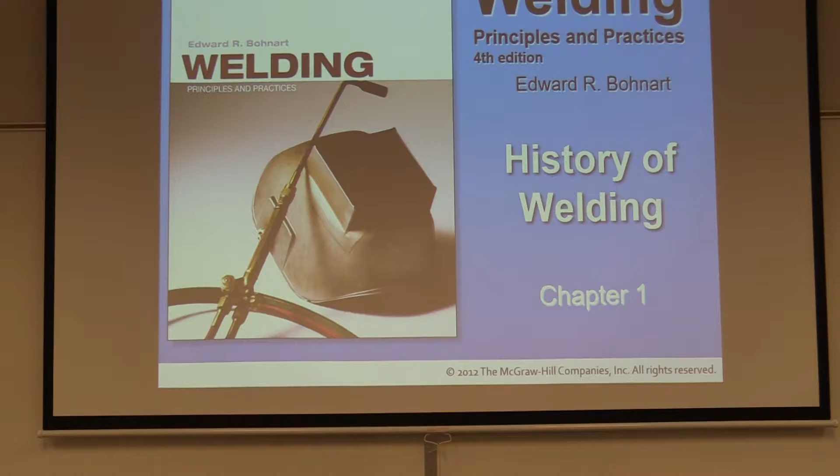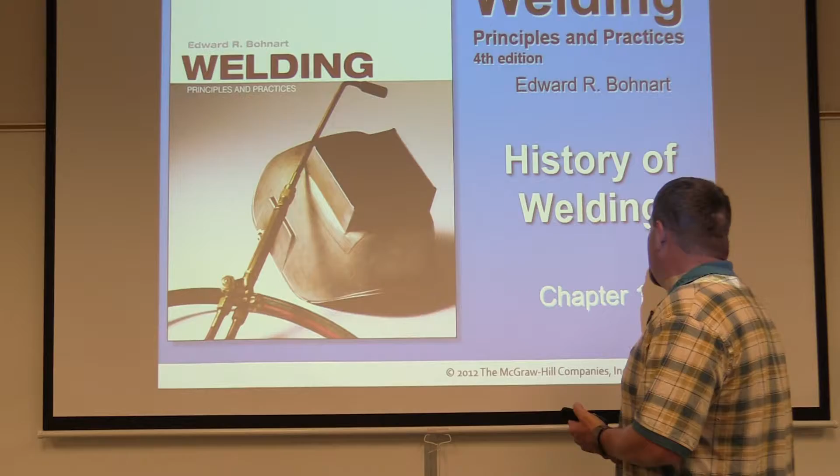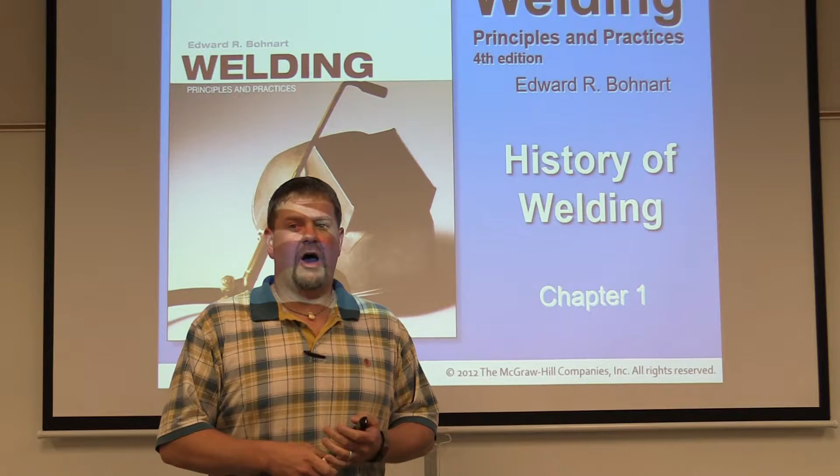This is chapter 1 of the Welding Principles and Practices book. You may not be getting this book your first class. You might be waiting until your second term. Make sure that you're devoted to the program before you pay money for the book. However, if you know you're going to continue to keep going through the program, I strongly suggest getting this book.

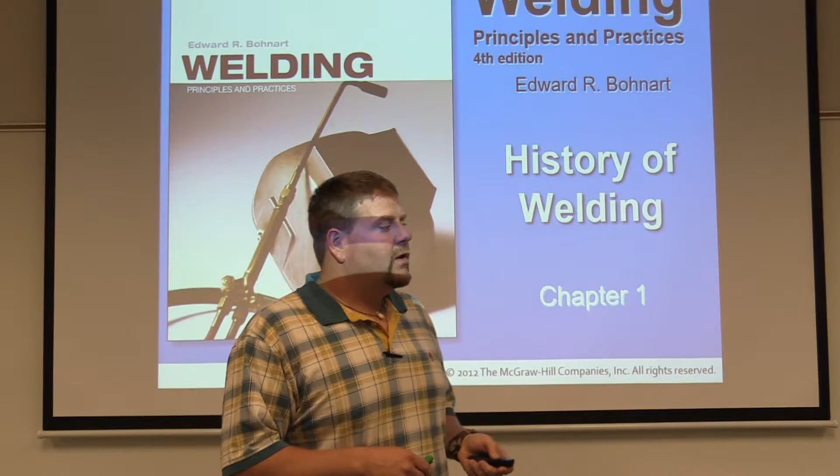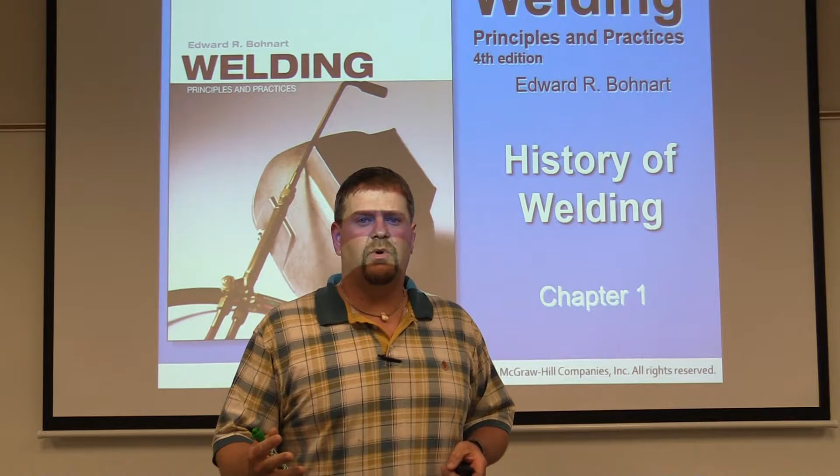You can use the video lectures, highlight things out of the book that I'm going to talk about and discuss, along with going through the PowerPoint presentations. Now the PowerPoint presentations are available on Blackboard as well. I'll be able to go through this. I'm going to talk about some things that I feel are important, not just reading from the book, but also how they tie into everyday situations within welding and your career, moving through your career.

Bear with me a little bit. We're just kind of starting out a new room. This is the first video we're doing.

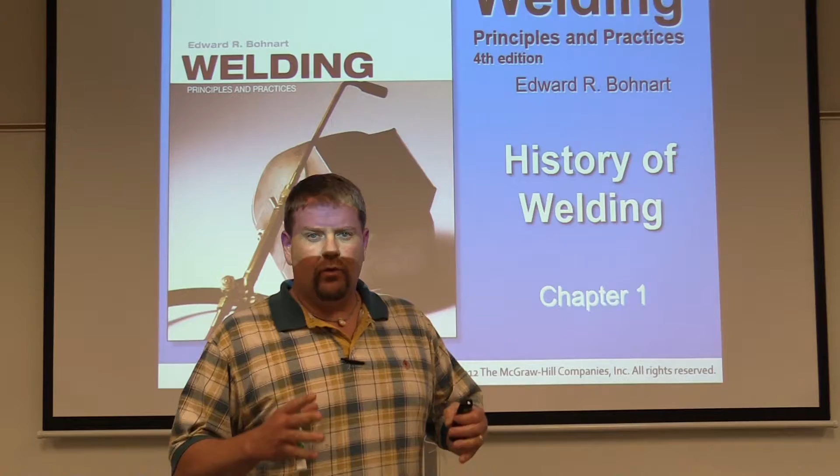So let's talk a little bit about successful note taking, okay? So for example, here's a PowerPoint presentation. You're going to be able to find some of this stuff in your book as well. Most of the material out of it's the same. So I'm going to tell you which page it's on. I'm going to say, left-hand column, about halfway down. So for example, let me just start out doing it.

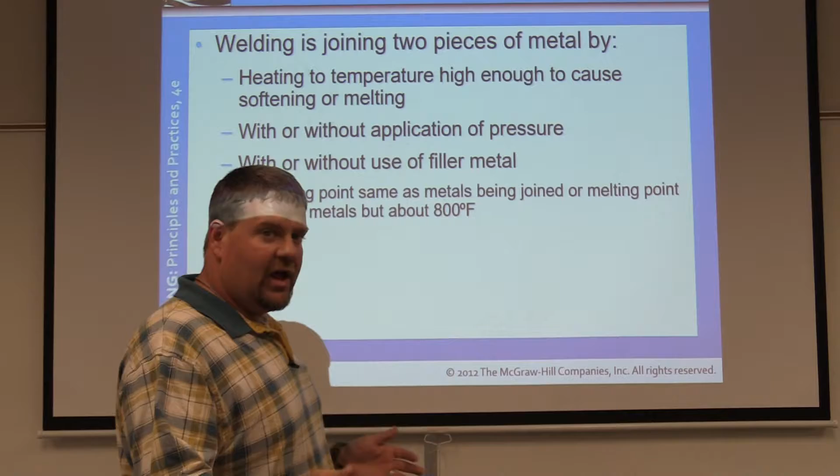Page 2, chapter 1. History of welding, left-hand column, it's going to start out overview. Now the second paragraph in starts out with the word welding, and basically I'll read from it and you can highlight that paragraph, or you can also look at it. We're going to hit the highlight and the bulleted points from the PowerPoint here. Okay, so let's start out.

Welding is the joining together of two pieces of metal by heating to a temperature high enough to cause softening or melting, with or without the application of pressure, and with or without the use of filler metal. Any filler metal used has either a melting point approximately the same as the metals being joined, or a melting point that is below these metals but above 800 degrees Fahrenheit.

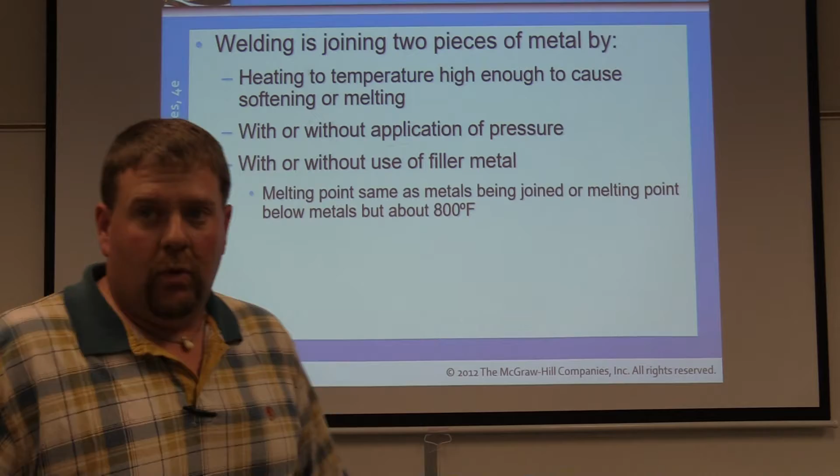So that's one paragraph that I started to read out of the book, and I might tell you that's a bulleted point. Now anything I read on these lectures, you want to highlight or take notes on, okay? So starting this year, we're probably not going to allow you to use the book. You're going to have to take handwritten notes. You can bring your handwritten notes in. You cannot type off the entire PowerPoint presentation. Okay? Handwritten notes only are allowed on the test, and we're going to stick with that throughout the program.

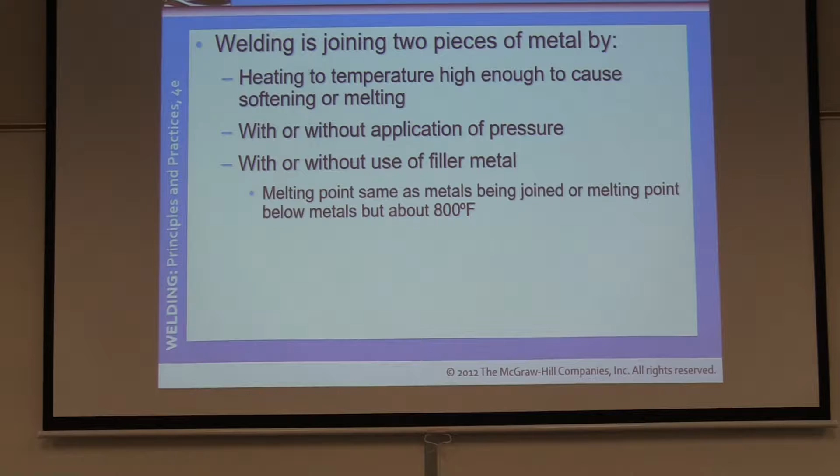Okay? So first thing, just what we read, welding is joining two pieces of metal by heating to a temperature high enough to cause softening or melting, with or without application of pressure, with or without use of filler metal. Melting point, same as metals being joined, or a melting point below metals, but above 800 degrees.

So as we get more and more throughout the courses, we're going to start talking about different things. So what's the melting point of iron ore? You know, roughly 2800 degrees, 2780, 2790, right in there, degrees Fahrenheit. 800, 840 can be a very critical temperature between brazing versus soldering. These are all essential variables that matter within the welding technology field. Okay, so let's move on to the next one.

Let's go to page number 3, underneath the history of metalworking. 1, 2, 3, 4, or the third sentence down, it starts out, the first metal to be worked was probably pure copper because it's a soft ductile metal that was widely available. Ductile, you see it highlighted, means easily hammered, bent, or drawn into a new shape or form. Okay? So this is hitting some high points, but notice we don't say anything about being ductile, correct? Okay, so let's go back.

So some of your test questions may not just be off the PowerPoint, some of them might be off of things I talked about. So for example, ductile is a bulleted item. You need to understand what ductile means, okay? And let's read it again. You can always look back in the definitions as well, but ductile means easily hammered, bent, or drawn into a new shape or form. Okay?

So let's skip down 1, 2, 3 sentences. Right-hand part of that column, it starts out and it says more than 4,000 years ago. Okay? Again, more than 4,000 years ago, copper mines on the peninsula of Sinai and the island of Cyprus were worked.

I may not have pronounced them correct. Welding began more than 3,000 years ago when hot or cold metals were hammered to obtain a forged weld. Forged metals, bronze and iron, are mentioned in the Old Testament.

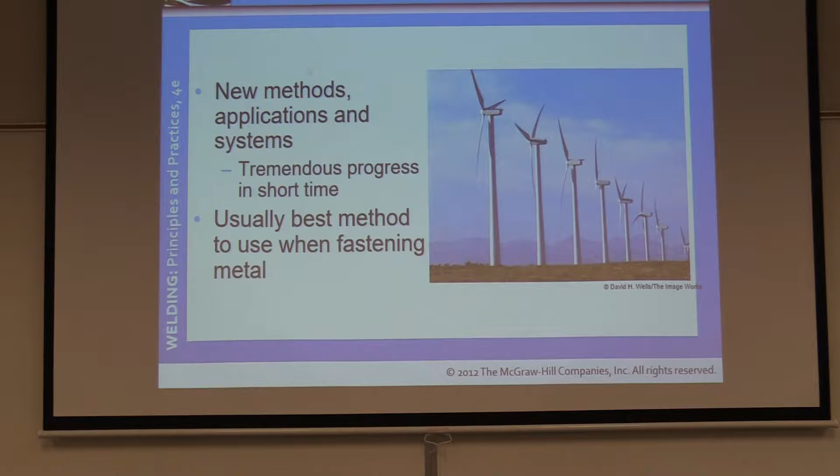So you may get a question asked that says welding began more than 2,000, 3,000, 4,000 years ago. Okay? In this case, according to the text, it was more than 3,000 years ago, even though at the beginning of the sentence or the paragraph it stated more than 4,000 years ago. Okay?

Here we talk about began when people found they could shape rocks by chipping them with other rocks. Copper, probably first metal to be worked. Here we're talking about ductile. Okay? Easily hammered, bent, or drawn. It was dated in Egypt as early as 4,000 BC and USA before 2000 BC.

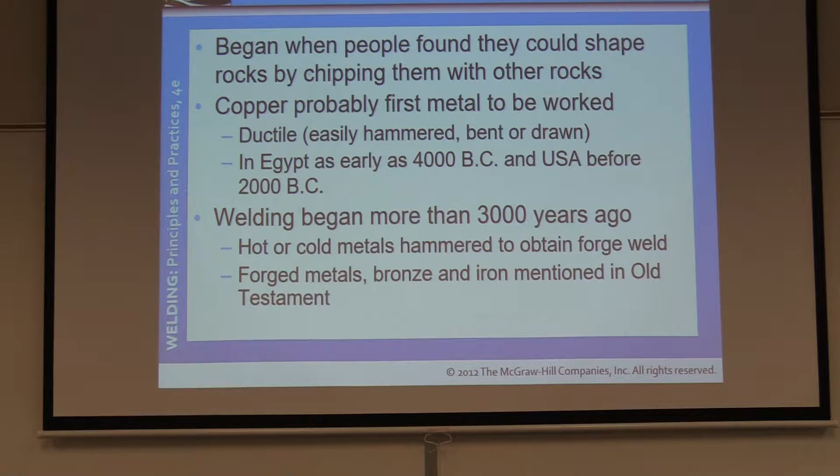Welding began more than 3,000 years ago. Hot or cold metals hammered to obtain a forge weld. Again, it was written into the Old Testament. Next paragraph. Archaeologists have determined that bronze was developed sometime between 3,000 and 2000 BC. Iron became known to Europe about 1000 BC, several thousand years after the use of copper.

So we talk about the Bronze Age, we talk about the Iron Age. This gives us a little bit of perspective as far as what timeline it was there. Okay, so bronze was developed between 3,000 and 2,000. Iron became known to Europe about 1000 BC. The Philistines had 4 iron furnaces about 1300 BC, produced swords, chisels, daggers, and spearheads.

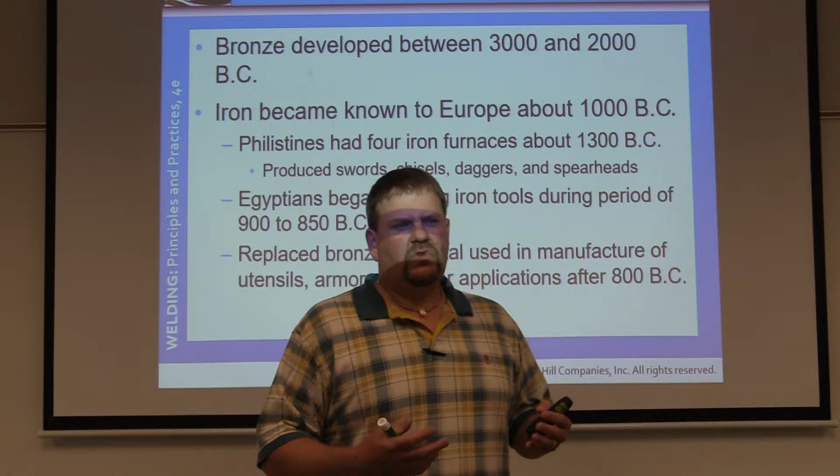Egyptians began making iron tools during the period of 900 to 850 BC and replaced bronze as metal used in manufacture of utensils, armor, and other applications. Part of the reason why is because iron is a lot harder material. We just talked about ductile. Bronze was very ductile. It's easily bent, hammered, and forged. So it's a lot softer material than iron itself was.

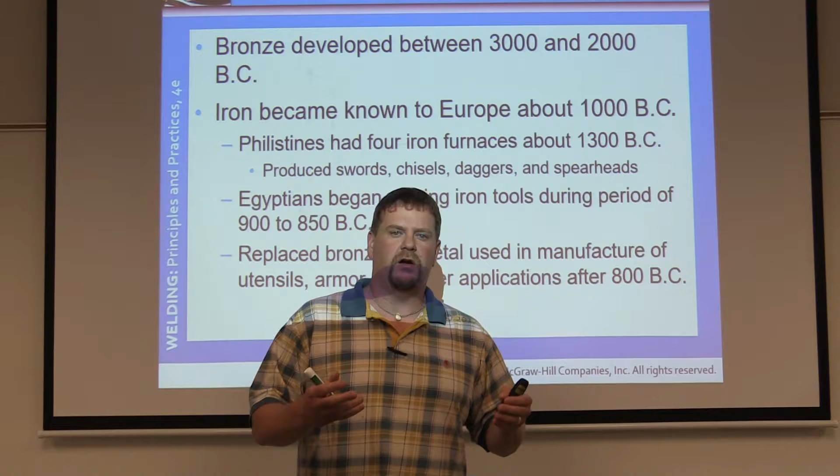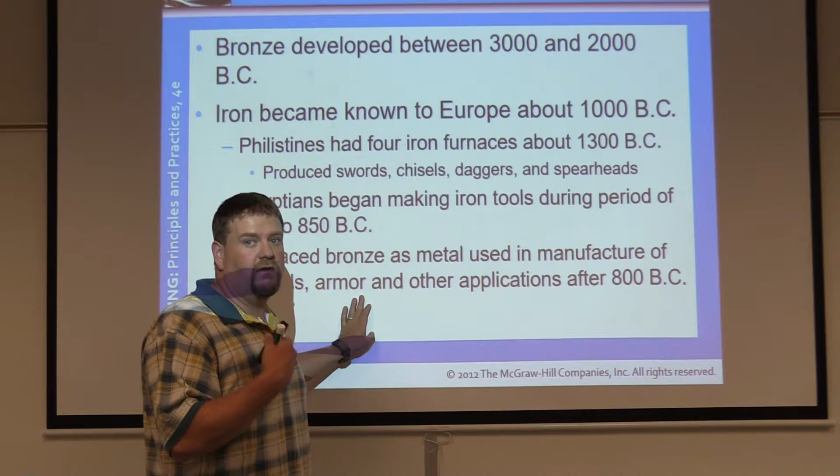So for an example of armor, you want a really hard material there to be able to keep spears, arrows, swords, and so forth from penetrating into it. If it was really soft, it would eventually get thin and break through, costing you your life at that era. All right.

Next paragraph, the famous Damascus swords and daggers made in Syria about 1300 BC. Okay? They were sought after because of their strength and toughness, made by forge-welding iron bars of different degrees of hardness, drawing them down and repeating process many times. The working of metals followed one another in great ancient civilizations.

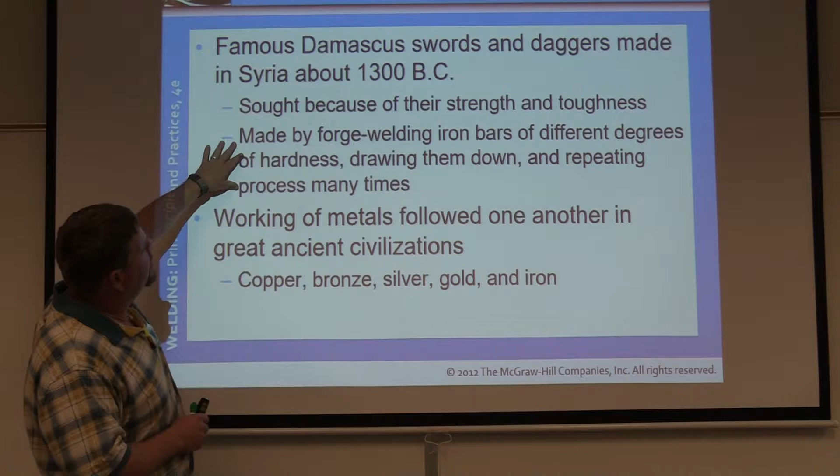Okay, let's take a break for a second. We start out working of metals, so let's just make sure that we're on the same page here. This was one paragraph that started talking about famous Damascus swords and daggers. It's on page 3, right-hand column. It's the second paragraph from the bottom. You can follow along the bullet points in your book. So if I was you, I would highlight that entire paragraph and what it talked about here, along with the PowerPoint, okay?

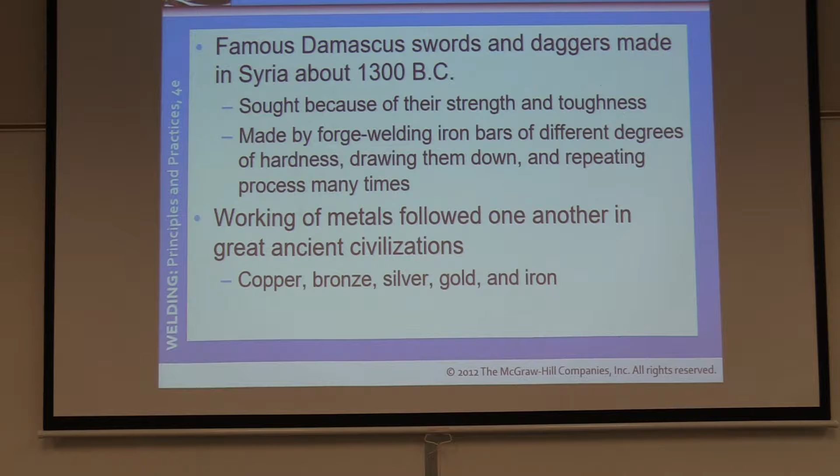Now the last paragraph starts talking about the working of metals. The book reads, the working of metals, copper, bronze, silver, gold, and iron, followed one another into the great ancient civilizations. By the time of the Roman Empire, the use of iron was common in Europe, the Near East, and the Far East. The Chinese developed the ability to make steel from wrought iron in AD 589.

The Belgians were responsible for most of the progress made in Europe due to the high degree of craftsmanship developed by their workers. By the 8th century, the Japanese manufactured steel by repeated welding and forging and controlled the amount of carbon in steel by the use of fluxes. They produced the famous samurai sword with a blade of excellent quality and superior workmanship.

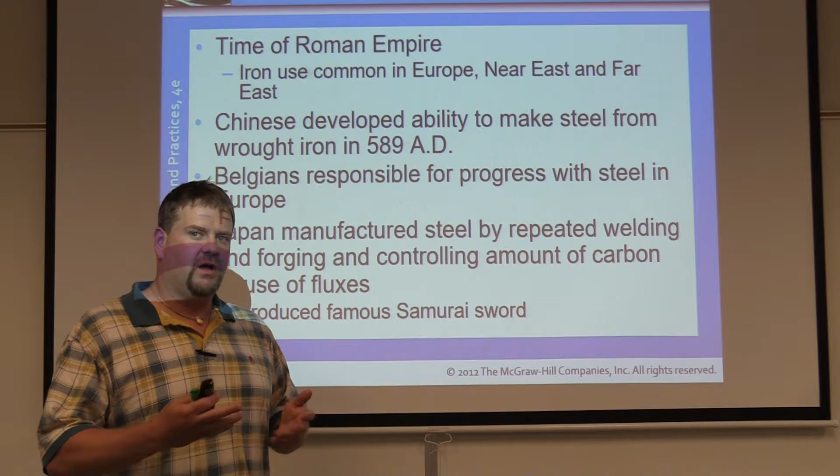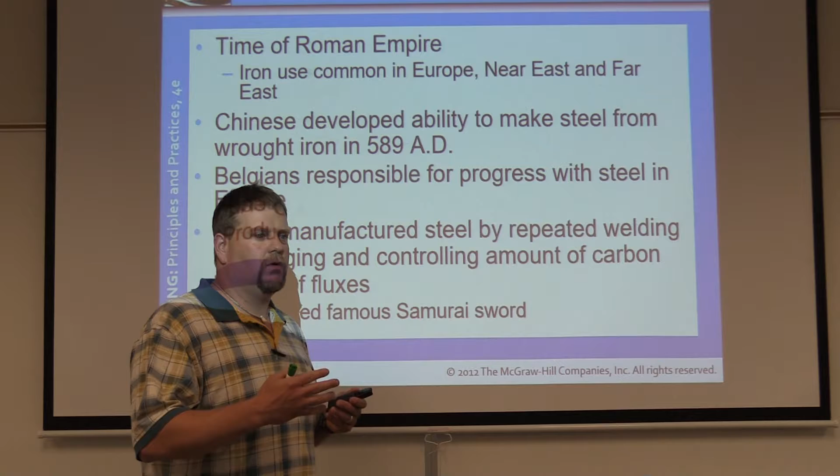If you get a chance, there's another one out there called the Ulfberht sword. There's a PBS, Public Broadcasting Service, video out there. You can go online and find it. It's free to look it up, and the documentary is actually called The Viking Sword. Really great video. It really starts to explain the metallurgy within it and how much work went into forging of swords, materials, and so forth, especially in that era.

Okay, so now we're on page 4, chapter 1, second paragraph down. Biggest thing that I want to focus on here is the blast furnace developed for melting iron about 1000 to 1200 AD. Now we just went back, we talked about iron was found in Europe 1000 BC, roughly 1300 BC as well. And now we're talking about the blast furnace was developed almost 2,000 years later, okay?

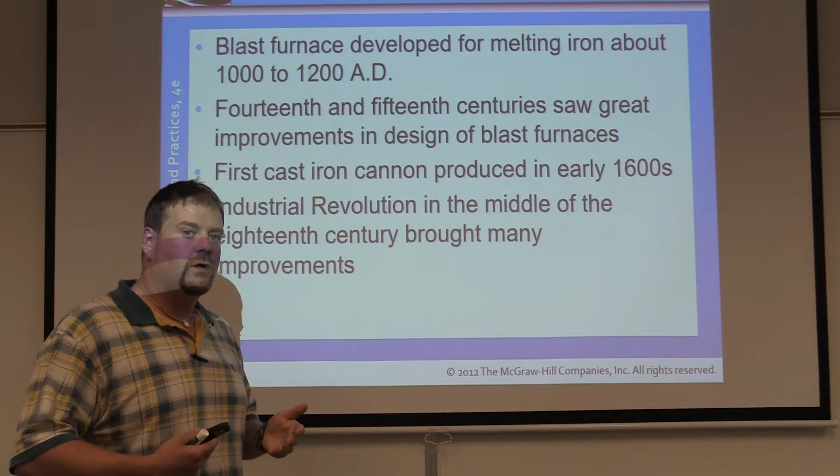So there was a long era there where forge welding was the only type of welding being used in the world. With the addition of blast furnaces, now we're able to start getting different qualities out of iron and steel, making steel, because steel is iron and carbon. We're starting to get better qualities out of the material we were manufacturing at that time, which was a huge benefit to a lot of soldiers, countries, equipment, and so forth, okay?

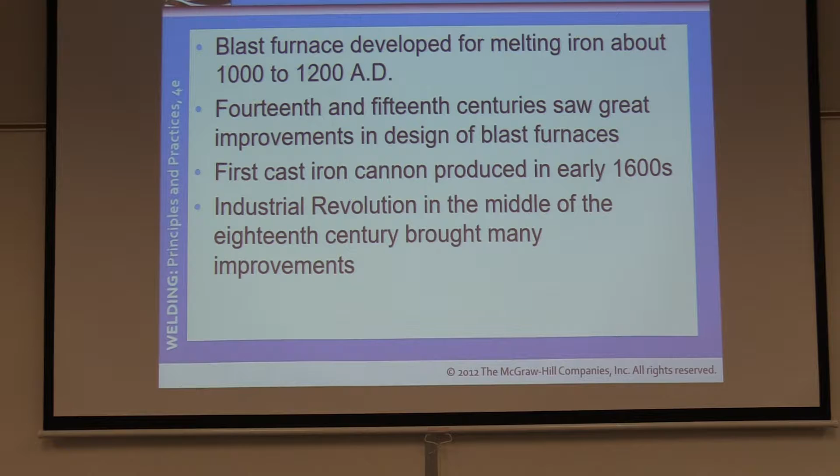14th and 15th centuries saw great improvements in design of blast furnaces. First cast iron cannon produced in the early 1600s. The Industrial Revolution in the middle of the 18th century brought many improvements. History of metalworking. The present factory system of mass production introduced. American Eli Whitney developed the idea of interchanging parts in the manufacture of arms.

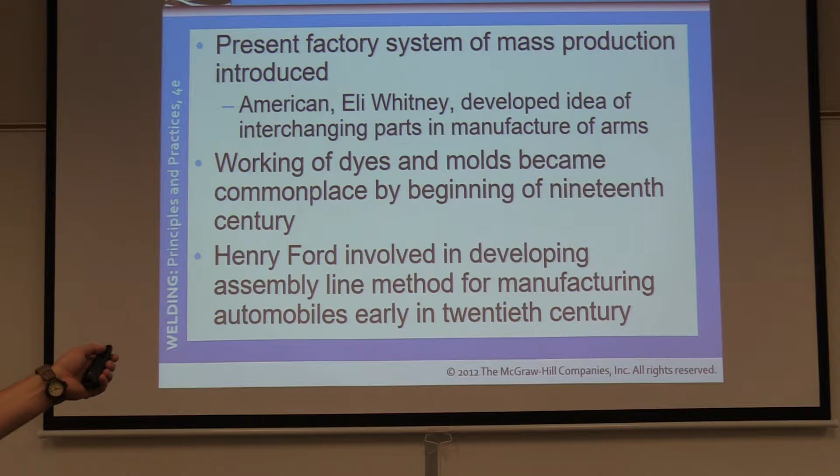Okay, let's back up. Let's look at our book. We're on page 4, left-hand column, halfway down, underneath the early developments in welding. The paragraph above that, this is where we're still at, about halfway through. You see him start talking about Eli Whitney, the development of interchanging parts and manufacture of arms. Okay.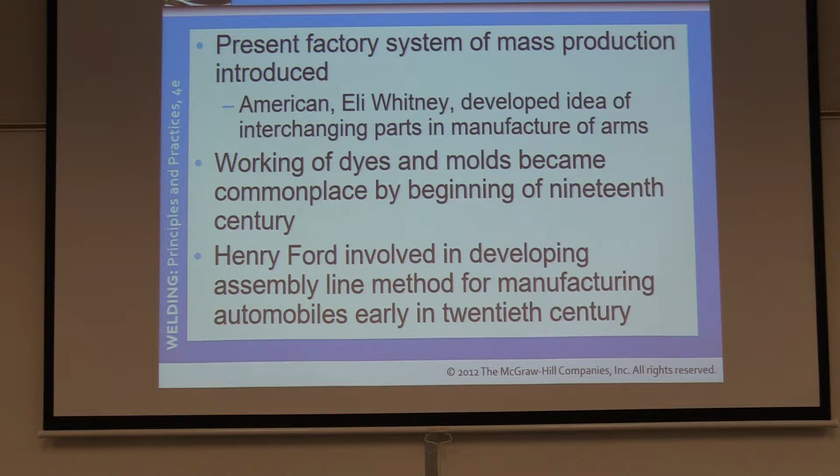Working of dies and molds became commonplace by the beginning of the 19th century. We still use that today. It speeds up the process. Jigs, fixtures, dies, and molds. Very important. Henry Ford was involved in developing the assembly line method for manufacturing automobiles early in the 20th century as well. All right.

So, let's go to chapter 1, page 4, early developments in welding. This is a bulleted item: at the beginning of the 19th century, Edmund Davy discovered acetylene, a gas that was later used in oxyacetylene welding, heating, and cutting. The electric arc was first discovered by Sir Humphrey Davy in 1801 while he was conducting experiments in electricity. These inventions were forerunners of present arc welding processes.

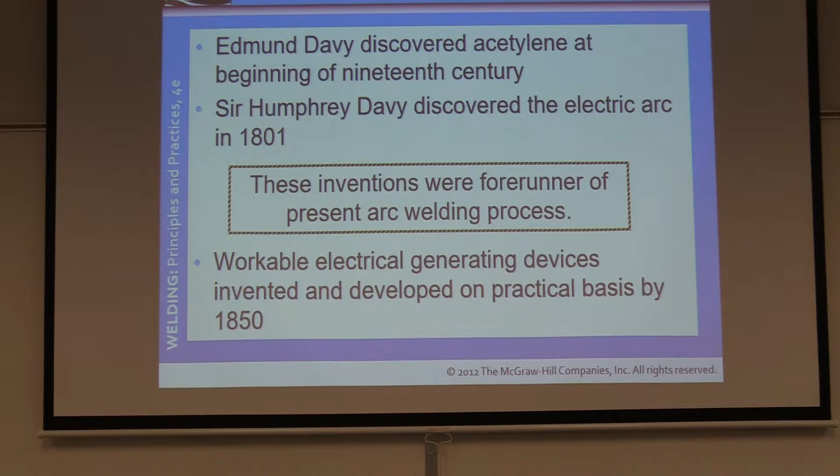The first documented instance, sorry, I'm going to stop right there. Next paragraph down, the first documented instance of fusion welding was done by Auguste de Méritens in 1881. He welded lead battery plates together with a carbon electrode.

This entire next page is just a highlighted item I want you to read through. It's very fascinating. You're going to see 1 or 2 questions out of it. Mainly they will be coming off of this PowerPoint, but a little bit out of my lecture as well. Okay.

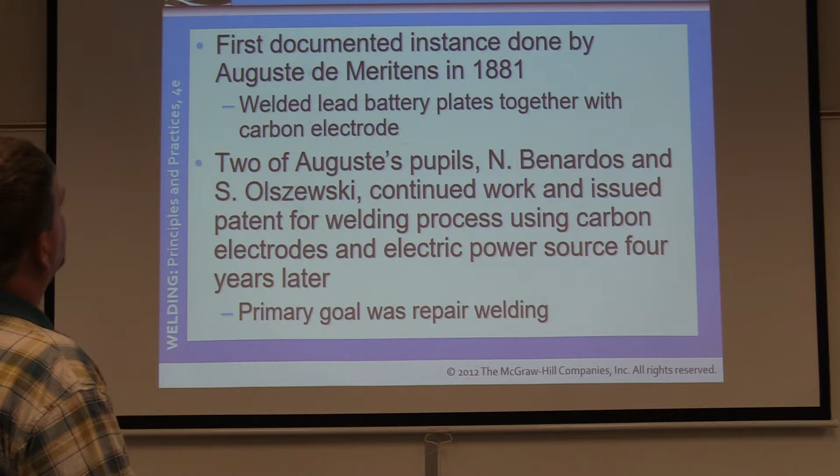Two of Auguste's pupils. I believe it's Nicholas. Let me look at the book here. Oh, it doesn't say. N. Benardos and S. Olszewski saw the possibilities of this discovery and experimented with the arc powered by batteries that were charged from high voltage dynamos. Okay? Using carbon electrodes and an electric power source 4 years later. Primary goal was to repair things so you didn't have to redo that.

Out of the book, after 4 years of work, they were issued a British patent for a welding process using carbon electrodes and an electric power source. Applications of the process included the fusion welding of metals, cutting of metals, and the punching of holes in metal.

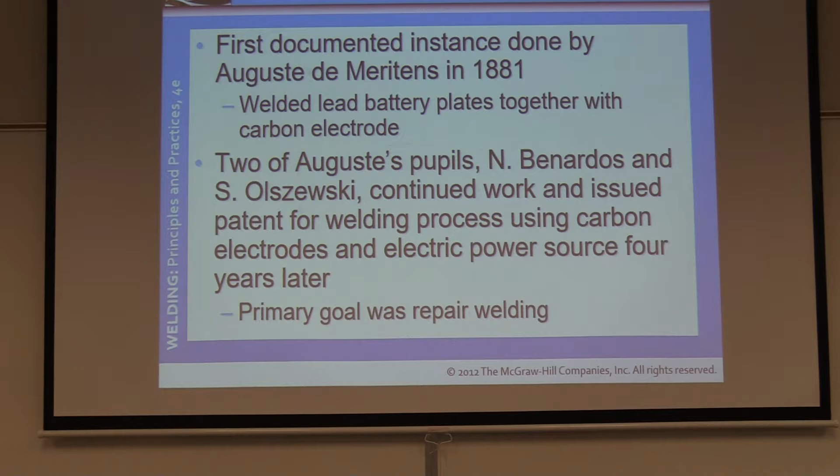Okay, we're going to skip over to page 4, right-hand column, first full paragraph down. It starts out, bare metal electrode welding was introduced in 1888 by N.G. Slavianoff, a Russian. His discovery was first recognized in Western Europe in 1892. C.L. Coffin was one of the pioneers of the welding industry in the United States. In 1889, he received a patent on the equipment and process for flash butt welding. And we'll talk about that later on as you're going through the program, okay?

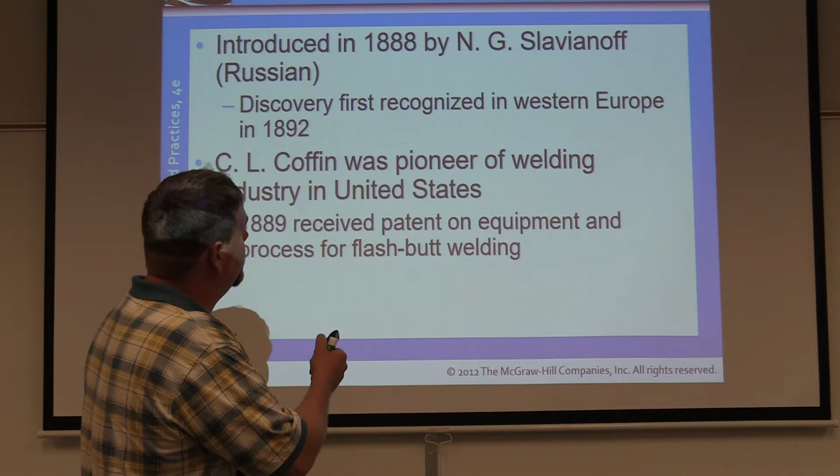So let's read through here. In 1890 he received additional patents for spot welding equipment. In 1892, working without knowledge of Slavianoff's work, he received a patent for the bare metal electrode arc welding process. By the turn of the century, welding was a common method of repair.

Highlighted especially at this time, welding was given added impetus by the development of the first commercial oxyacetylene welding torch by two Frenchmen, Fouché and Picard. Bare electrode welding became the prevailing electric arc welding method used in the U.S. until about 1920.

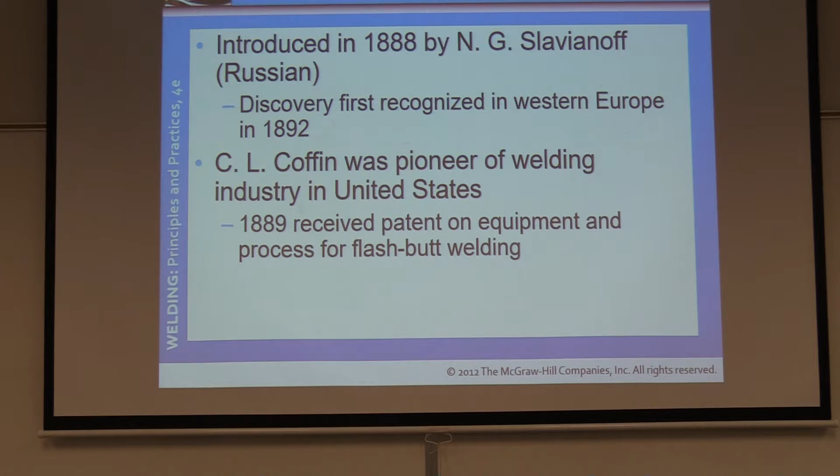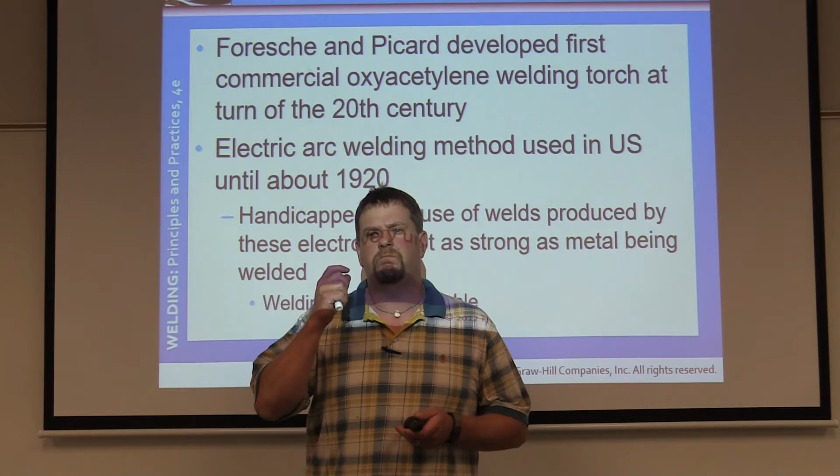So, here we talked about the electric arc welding method used in the U.S. till about 1920. It was handicapped because welds produced by these electrodes were not as strong as the metal being welded. The welding arc was very unstable. Remember, this was the beginning of the shielded metal arc welding electrode. So it didn't have the flux on it to help stabilize it. It was just a bare metal wire that they started welding with. Okay.

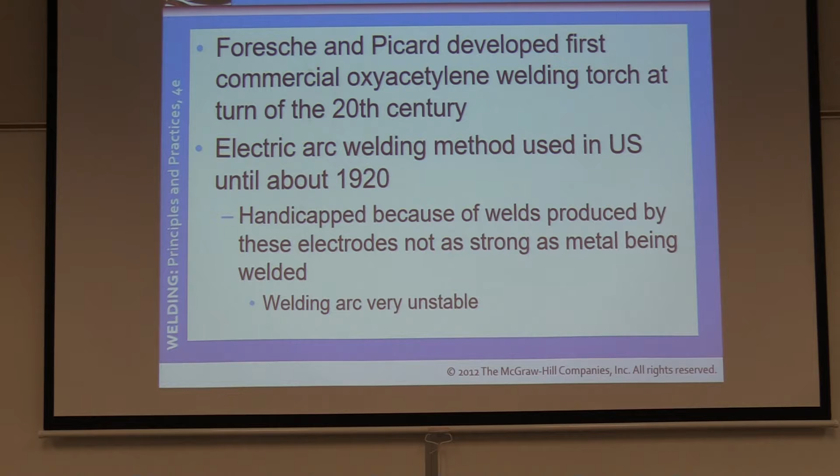Next paragraph, let's go down 1, 2, 3, 4 sentences in the center. Starts out, it says, in 1907, Kjellberg, a Swedish engineer, received a patent covering the electrode coating process. The coating was thin and acted only as a stabilizer of the arc rather than as a purifier of the weld metal. Produced welds a little better than bare electrodes, but again, not quite to the level that we're seeing today. Okay?

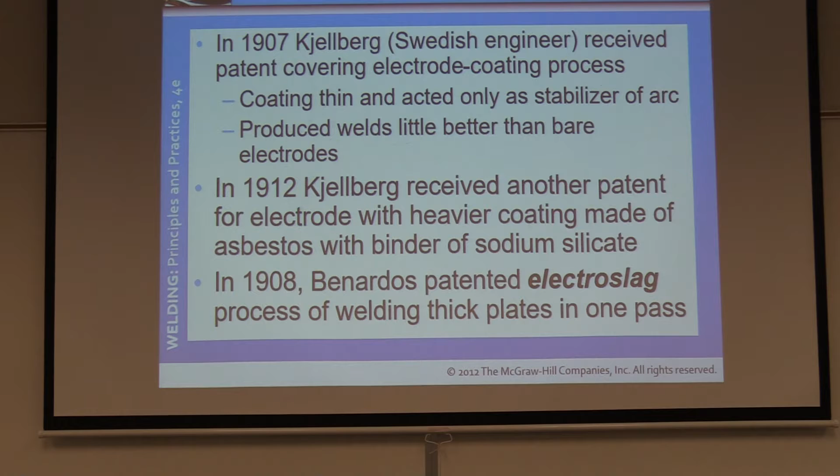In 1912, Kjellberg received another patent for electrode with heavier coating made of asbestos with binder of sodium silicate. In 1908, Benardos patented electroslag process of welding thick plates in one pass. And that's kind of a bolded item because electroslag is a process that's different than shielded metal arc welding.

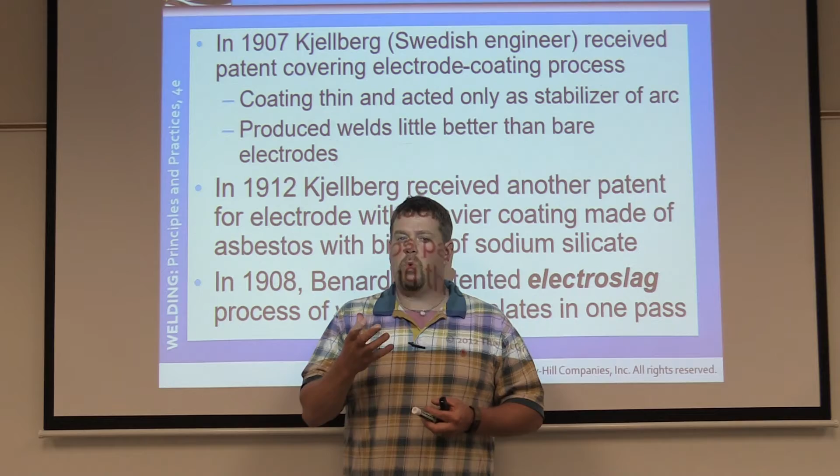Electroslag typically welds from the bottom to the top. So it's very similar to, say you have two really hot pieces of material, you have them formed, bring them together, and then you add a filler metal and you just watch it fill up. So basically your filler metal is going to start from the bottom and it's going to fill all the way up. Okay? So that's one pass. It's considered one weld. If you had the correct amount of material there, it would weld and fuse all the way at one time.

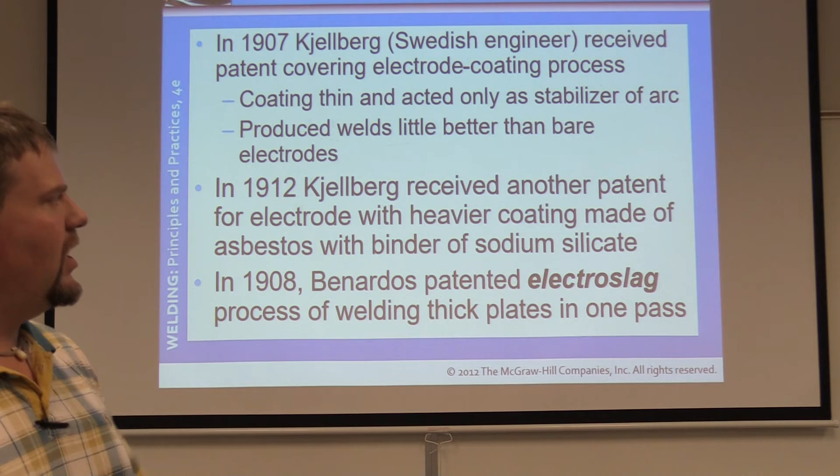We'll talk more about this through other chapters as well. So don't get too hung up on exactly what it is, but you can always research it if you want. Okay?

All right. Chapter 1, page 5, reading out of the book now. Left-hand column, it starts out: at the end of World War I, welding was widely accepted. Research on coated electrodes through the 1920s resulted in electrode coatings and improved core wire. This significant development was the main reason for the rapid advancement of the stick welding process. This term has now been superseded by the term shielded metal arc welding, what we use today most commonly, especially in nasty weather conditions. It's not affected by wind, rain, so forth.

All right, keep going. I'm reading off the PowerPoint now. So by the end of the war, the welding was widely accepted. Okay, out of the book. Development of modern welding. I want you to read that first paragraph by yourself. Might be a question that comes out of there, so I want you to pay attention to what's in there. Second paragraph, so we are on page 5, chapter 1, right-hand column, second paragraph down, starts out with World War II.

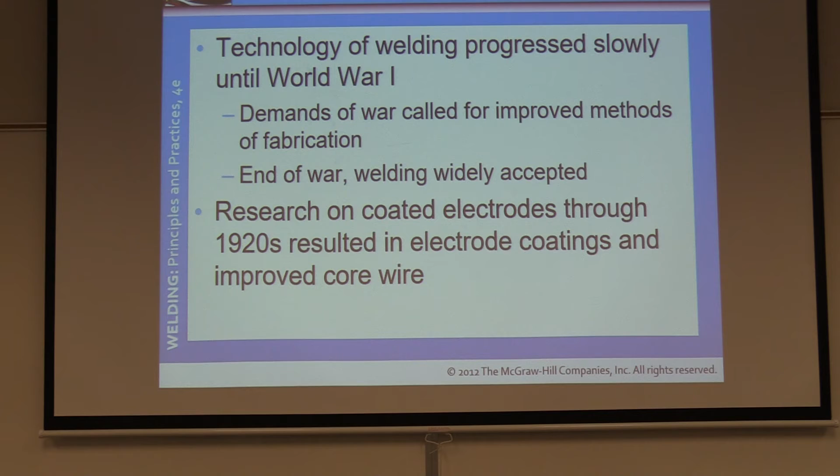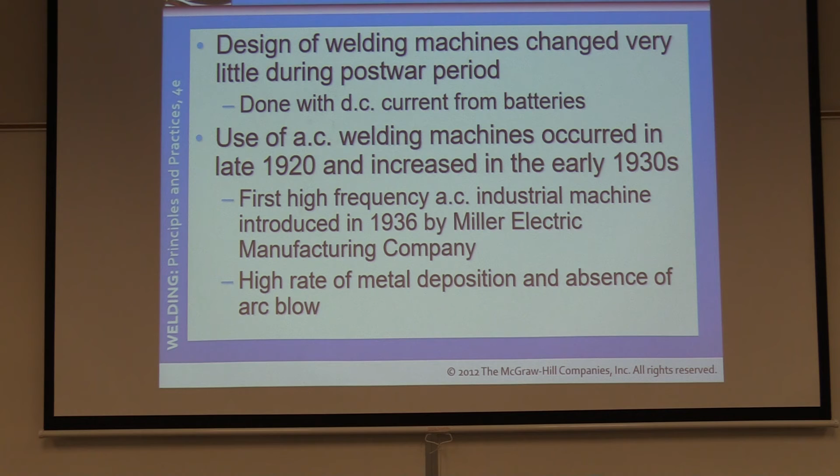Okay, World War II spurred the development of inert gas welding, thus making it possible to produce welds of high purity and critical application. A patent was issued in 1930 to Hobart and Devers for the use of the electric arc within an inert gas atmosphere. Trying to figure out where my PowerPoint ties into my book here. Give me 1 second. Here we are. The patent was issued in 1930 to Hobart and Devers.

Okay, off the PowerPoint, it was not well received because of the high cost of argon and helium and lack of suitable torch equipment. Now, argon and helium are pretty easy to get. At that point in time, you couldn't run down to Airgas or Norco or Oxarc and just pick up a bottle for $100. All right. Paragraph below that starts out, Russell Meredith.

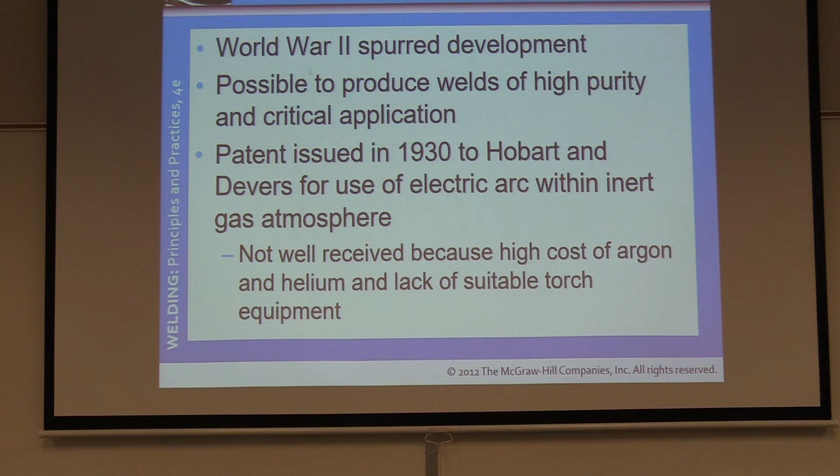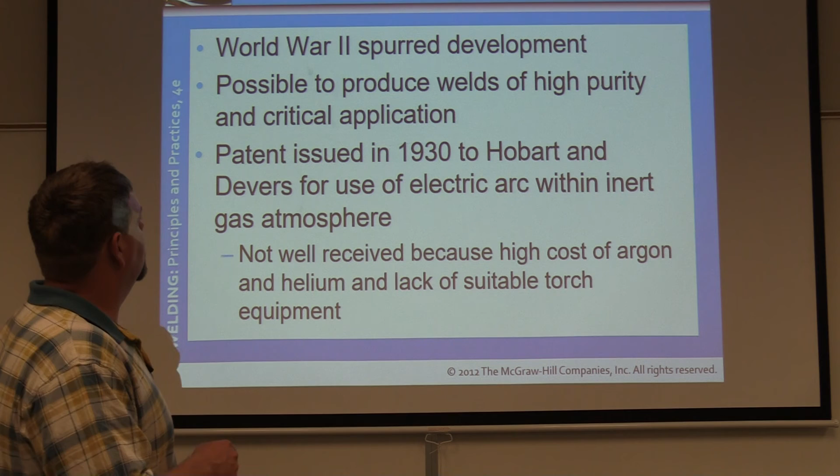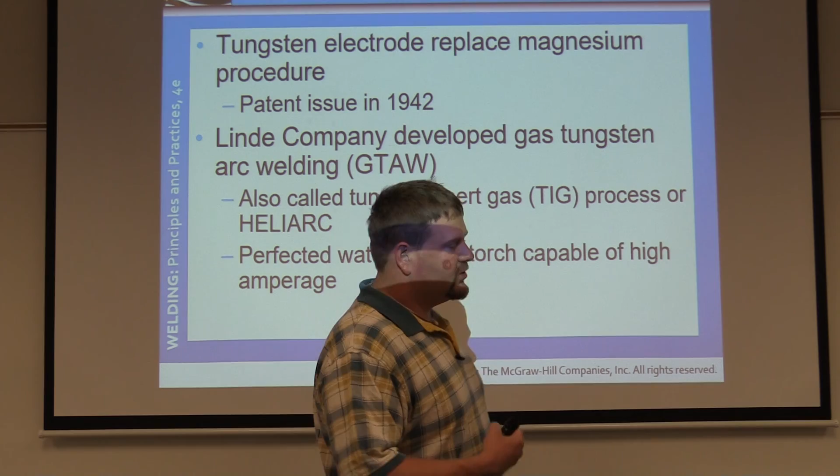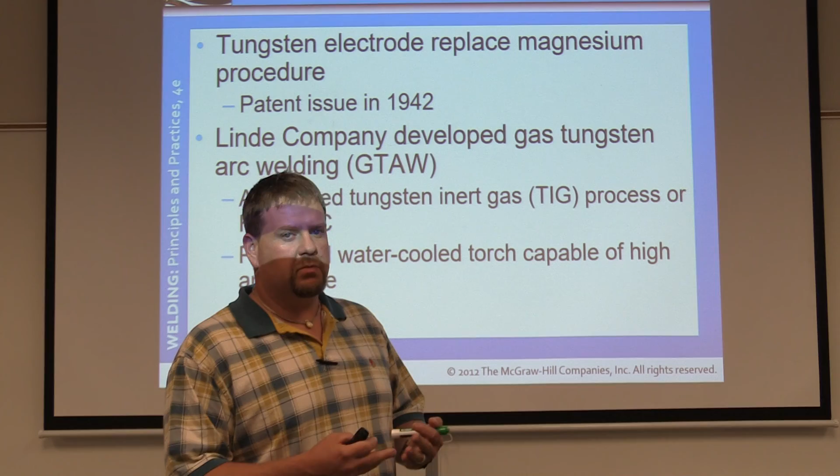Now, let's back up and talk about this real quick off of the PowerPoint, okay? So, tungsten electrode replaced magnesium procedure. Patent was issued in 1942. Yeah, we're going to talk about it with the book as well. So when we talk about inert gas atmosphere, what we're talking about now is going to be gas tungsten arc welding, gas metal arc welding, so forth. So we're using the TIG torch and an inert gas to help stabilize and shield the weld puddle. With gas metal arc welding, commonly known as MIG, same thing. So around this era was when it was first started, or getting more modernized, I should say.

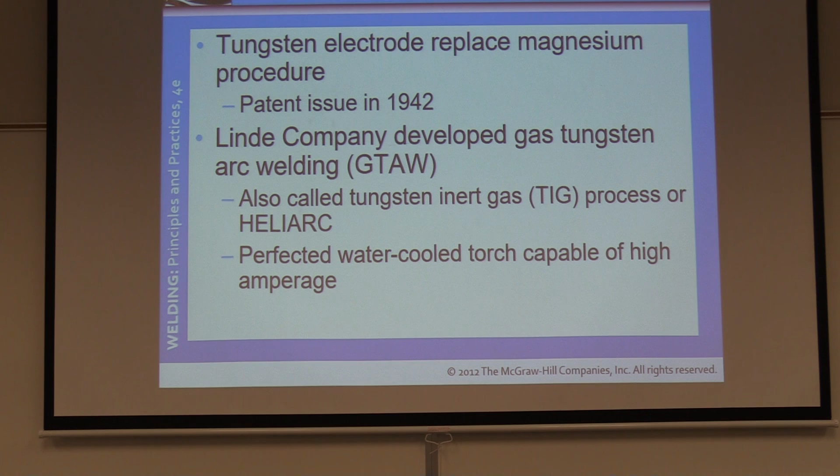So we're going back to the book, page 5, right-hand column, halfway down. Russell Meredith, an engineer for the Northrop Aircraft Company, was faced with the task of finding an improved means of welding aluminum and magnesium in the inert atmosphere. Because of the high burn-off rate, the magnesium procedure was replaced by a tungsten electrode, and a patent was issued in 1942. Later, in 1942, the Linde Company obtained a license to develop the gas tungsten arc welding